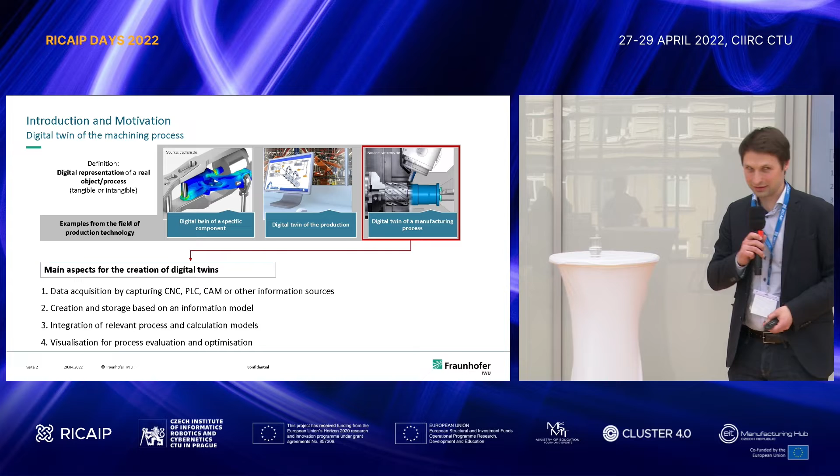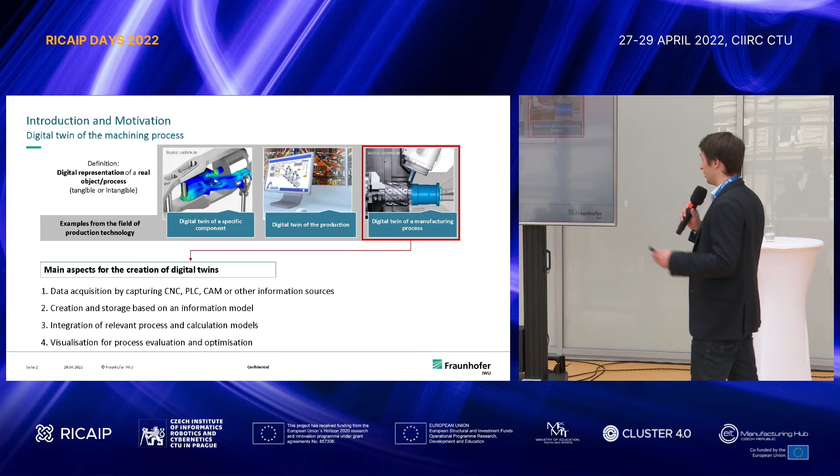I will not say too much about the concept of digital twins, because I think a lot of people have already described what it means. When we are looking at the digital twin, we are focused on the manufacturing process. Maybe there are other fields of focus, but this is our focus.

There are a lot of main aspects for the creation. It is totally clear to have data acquisition from NC, from PLC, from CAM, or other information sources. Then, one of the most important points is to have an information model which describes the relationships of this data you collect, and then to get the knowledge to enhance this digital twin, you integrate relevant process and calculation models.

And I think we see it already, we're also working on a software. Then you need a possibility to work with them.

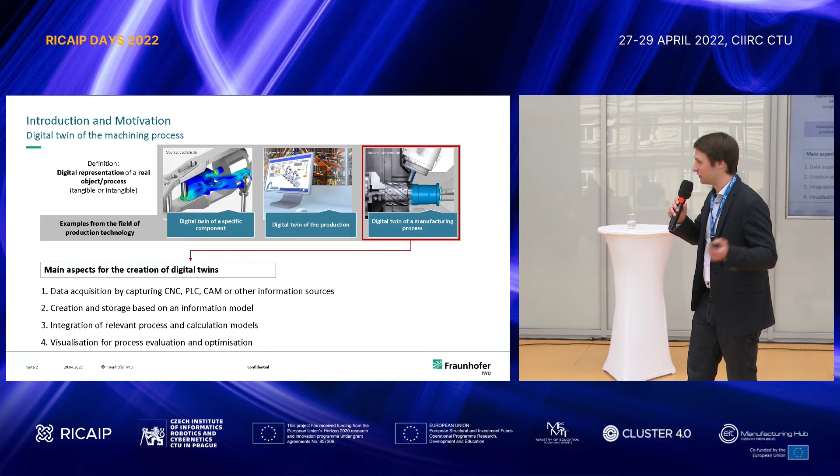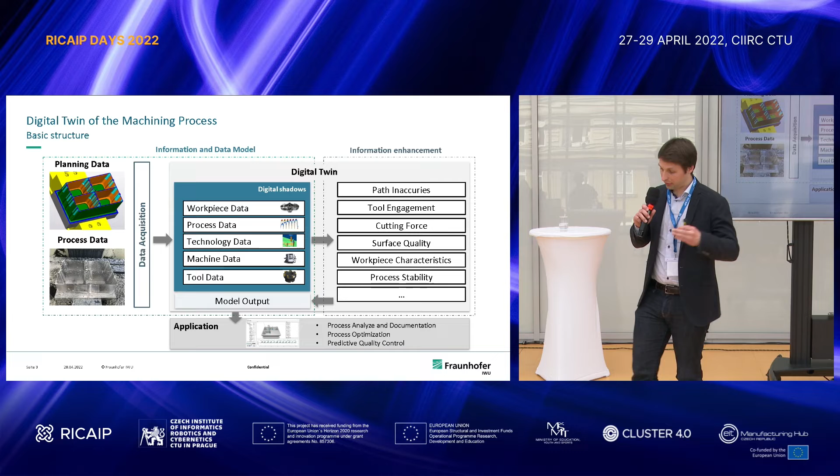When we take a look at the machining process, you have the side of planning data and the side of process data, and then you have to classify this data. We have data about the workpiece, data about the process, technology data, machine data, and tool data, and all of this we have to combine to build up the information model. This is just named the shadow, because it's just a data set without knowledge or information.

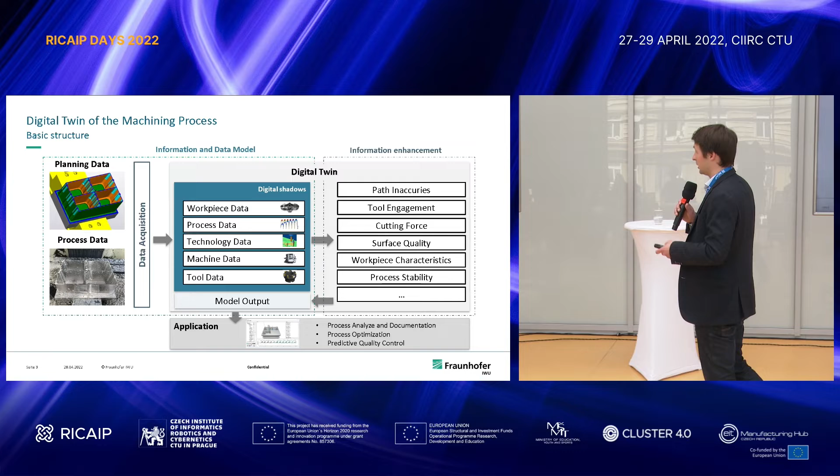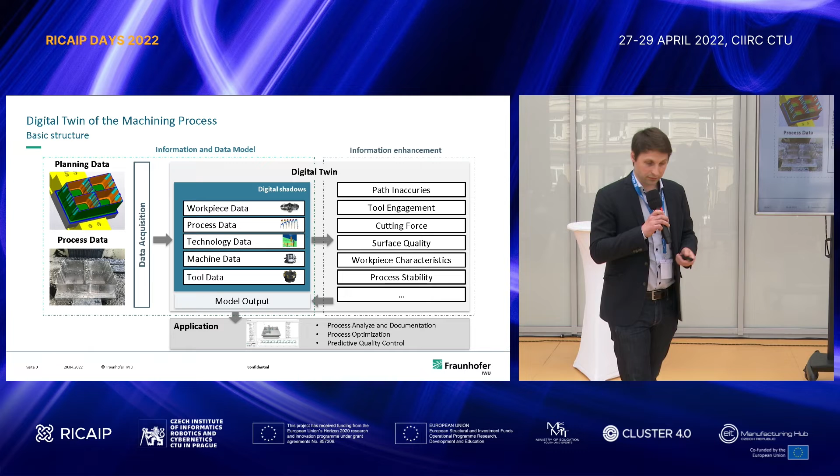Then you have to integrate technologically relevant models. We already see path inaccuracies, tool engagement, cutting forces, surface quality - it's like a modular system. Then we bring it back together, and we have the shadow combined with knowledge or with models, and then we can call it a twin.

When you look at the machining side, we see that we can equip a machine, maybe with an edge device or something else, to collect all the data. This is the left side, and it's all high frequency data - meaning maybe 1 millisecond, 2 milliseconds - actual position, currents, and so on.

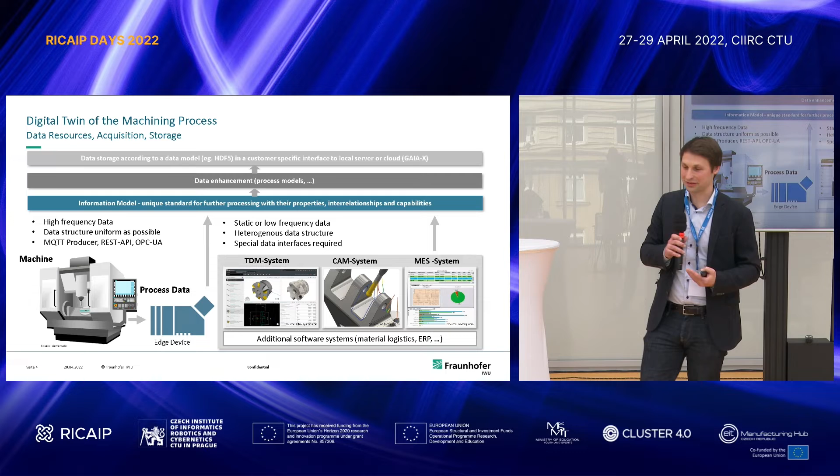There are some possibilities to collect all the data through connections, maybe OPC UA, but for high frequency it's not so common, though there are other connectivity systems. Then there's the side next to the processes - CAM system, tool data management system, MES system - and this is static or low frequency, heterogeneous data systems, which is sometimes not so easy to handle.

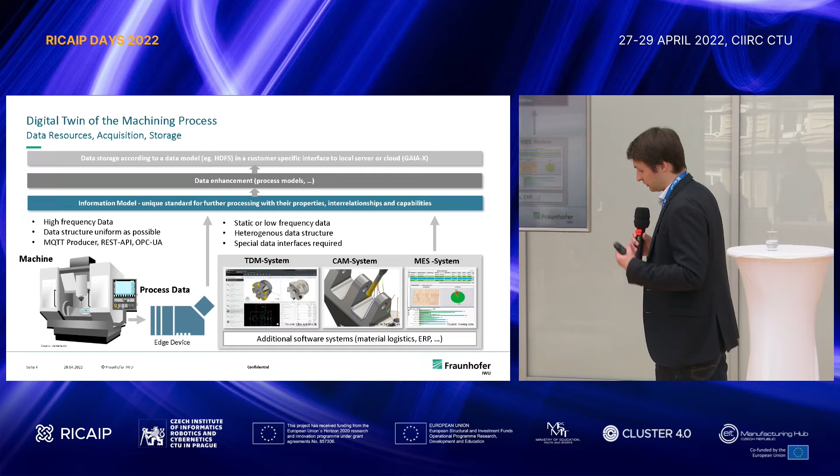We have to bring it together in our unique standard for further processing, to describe all the properties and relationships. Then our data enhancement increases with all the models, and then we have the discussion about data storage. In our solution, we work with the HDF5 format - a portable hierarchical data format developed by NCSA - which gives us the possibility to store time rows and also meta information.

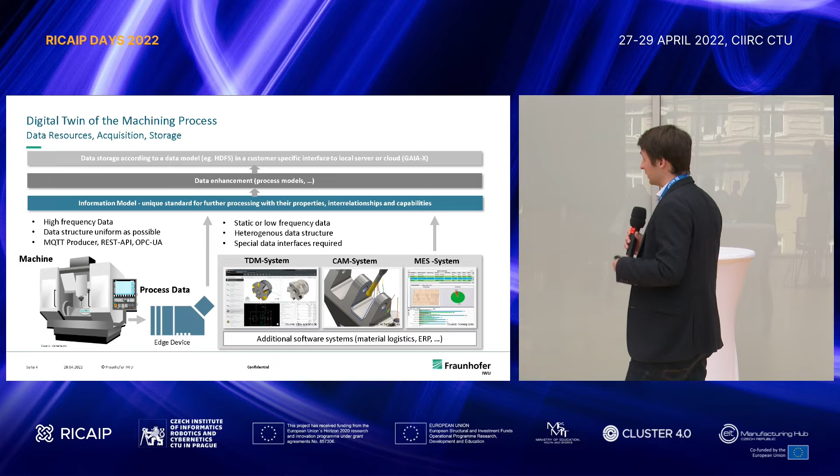And then you also have other possibilities to store it, cloud systems according to Gaia-X, or something else. So that's at least one example, but there are a lot more models.

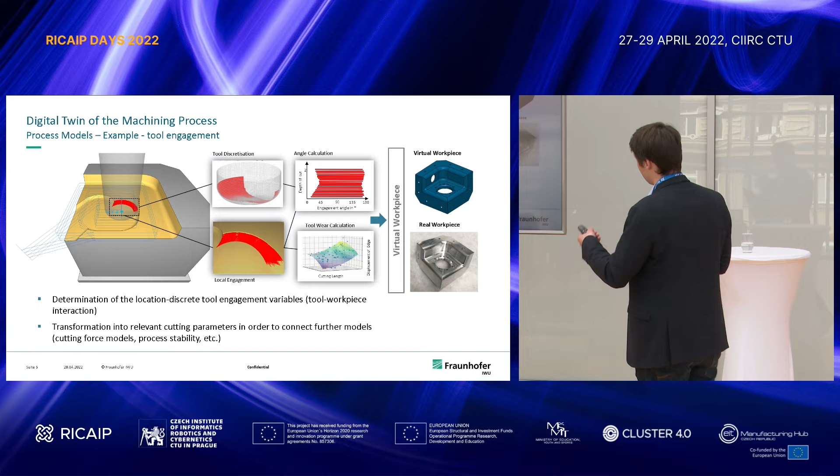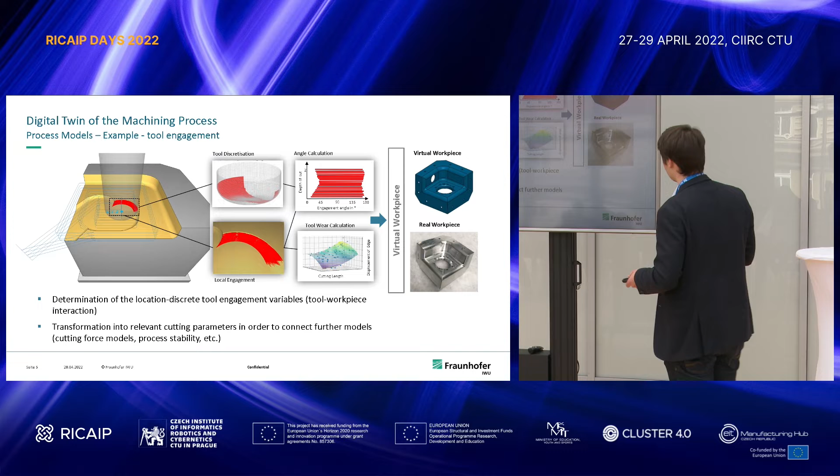One example, I think an important model, is tool engagement. There we have to discretize the tool, identify the engagement situation, get the local engagement, and get the angles, and maybe integrate some tool wear calculation. It depends a bit on which models you use.

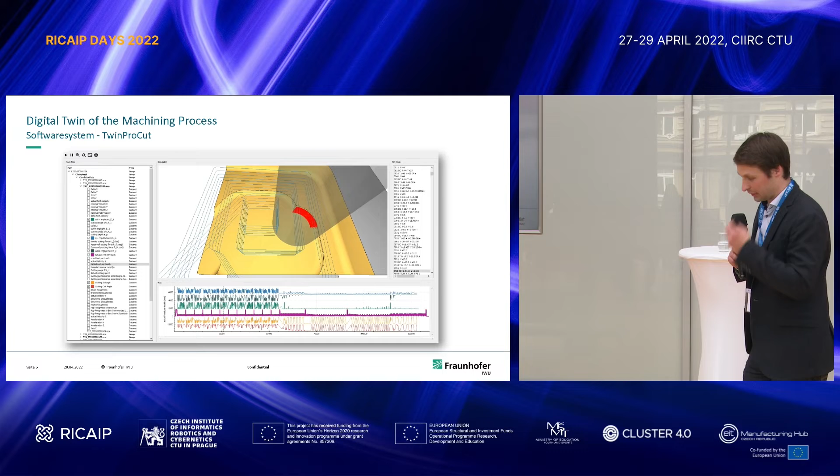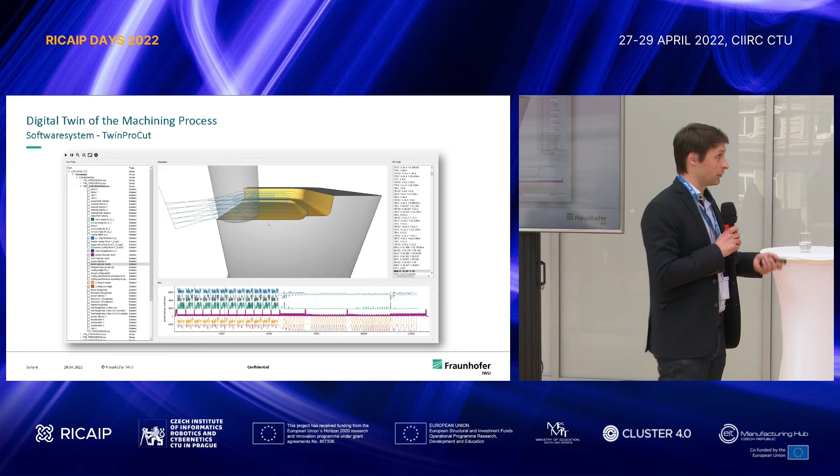And after that you get a virtual workpiece based on the process data. So, a short view of our software: you have the possibility to see what happened in the process with all process-relevant data. All this virtual solution is based on process data. There is no NC interpreter or anything else, it's just based on the process information.

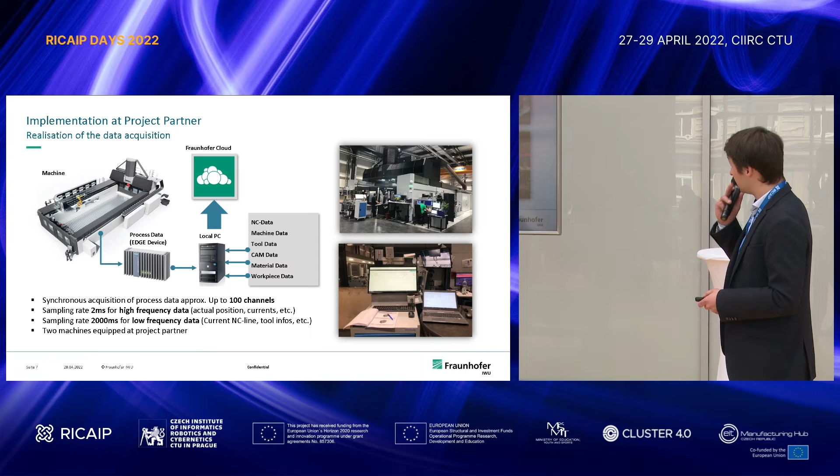So maybe this is finished regarding our solution and thinking about a digital twin, and I will say something about how we use it and implement it in a company for a project partner, where we equipped two machines with edge devices.

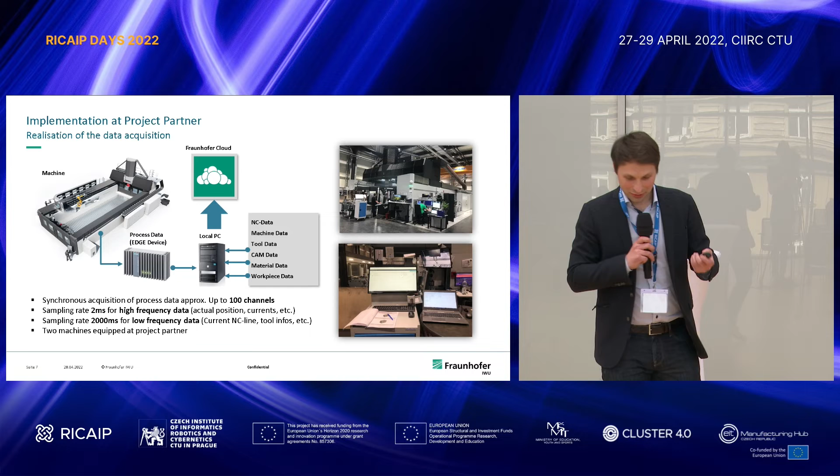We connected it to our computer system and to the Fraunhofer cloud, and all the time we collect data according to our information model, and then we sit in our office and analyze what happened. So it was possible to see some demonstrations showing what the tool engagement was along the tool path, what about the cutting forces, what happened there, so you have a representation of the discrete location and what happened in the process.

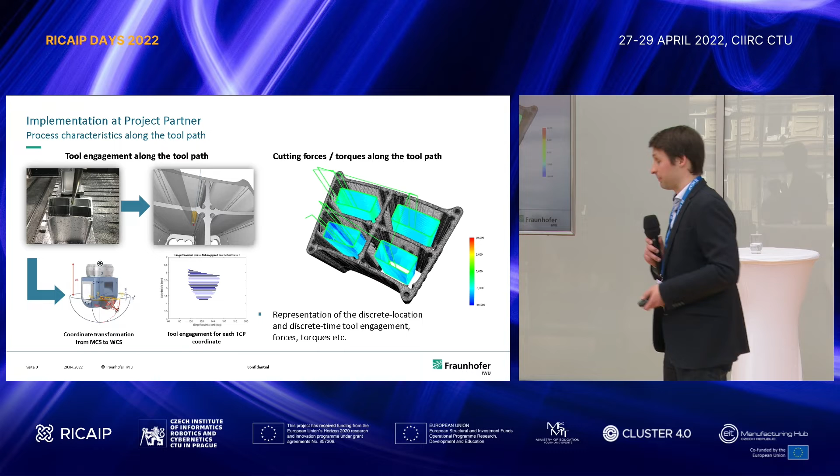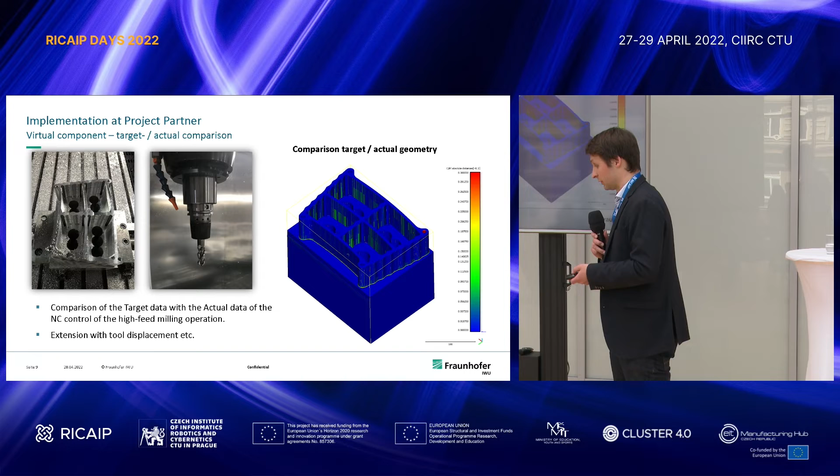And then you have the possibility to get a virtual component and make a comparison to the actual geometry, and then you see what happened with your quality, with your tool, or something else.

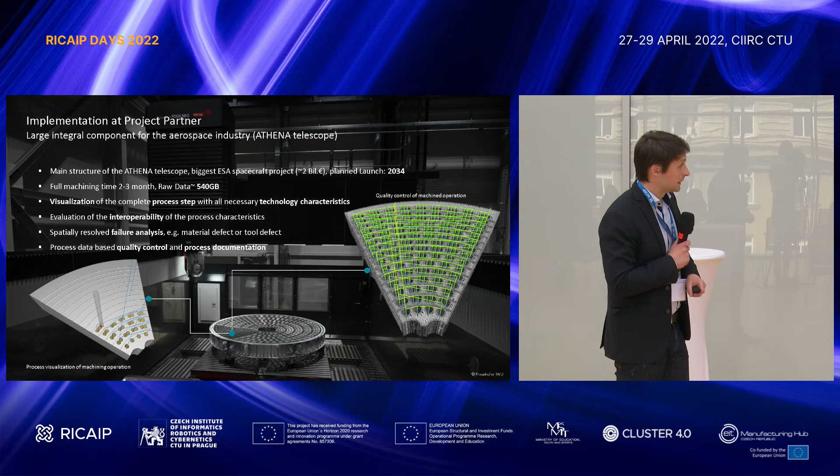So now I have an example. I think it's a really impressive one, because maybe Professor Ehrenfeld mentioned something about it this morning. It's a part of a large structure component for the Athena telescope, the biggest ESA spacecraft project. The planned launch is 2034, and they plan with 2 billion euros.

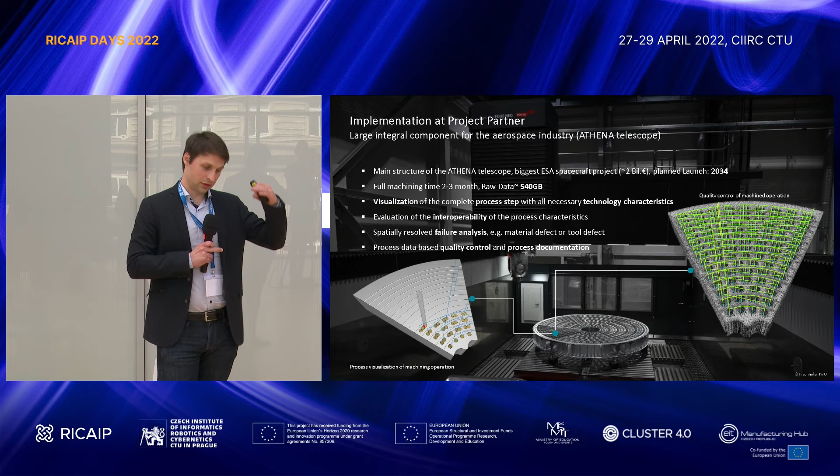And the main part of this project is a mirror structure, an integral machined component with a 4-meter diameter and a height of 330 millimeters, fully machined in one piece.

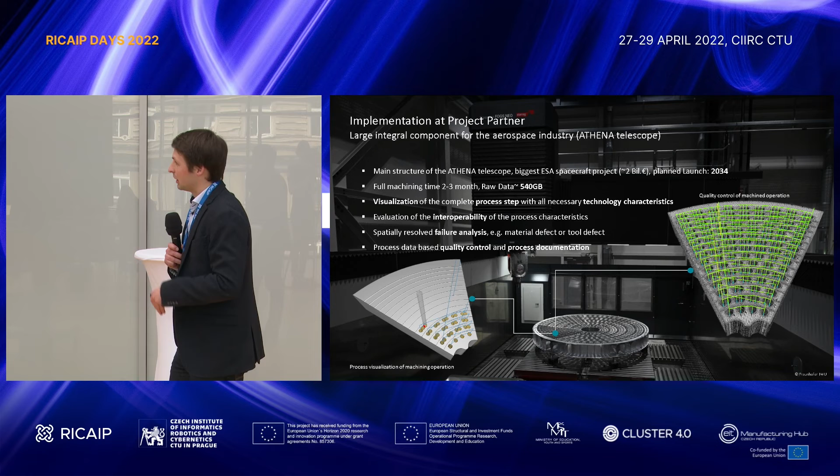And there we integrated our solution, meaning we collected all the data, around 540-550 gigabytes, all the time, according to our model. Then it was possible to visualize the complete process step with all necessary characteristics, and to see whether there were failures related to material defects, tool defects, and so on.

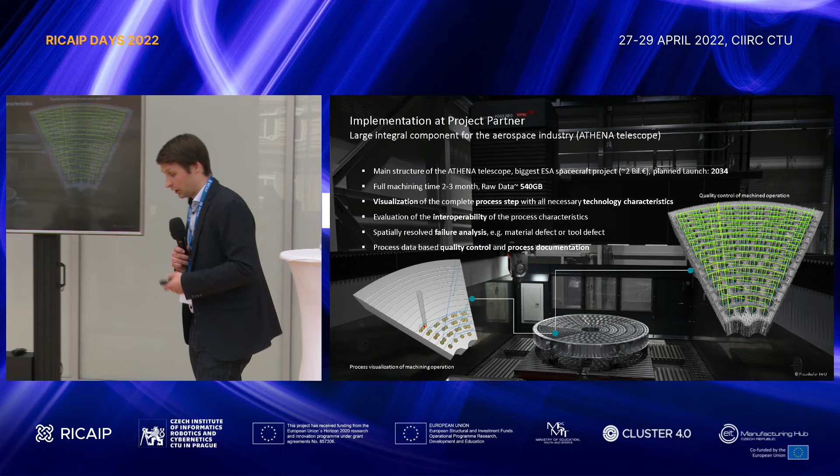And since it's a spacecraft component, it's also important to have a well-documented process evaluation, and with our solution it's possible to have a process data based quality control, and process documentation.

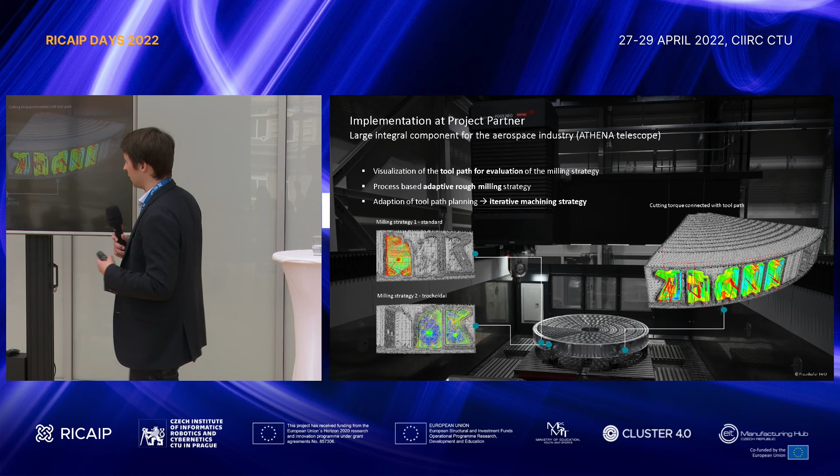So you have the possibility to see the tool paths, to investigate the best milling strategy, and to evaluate the process during the process itself, because this is a one-piece shot and everything must be clear.

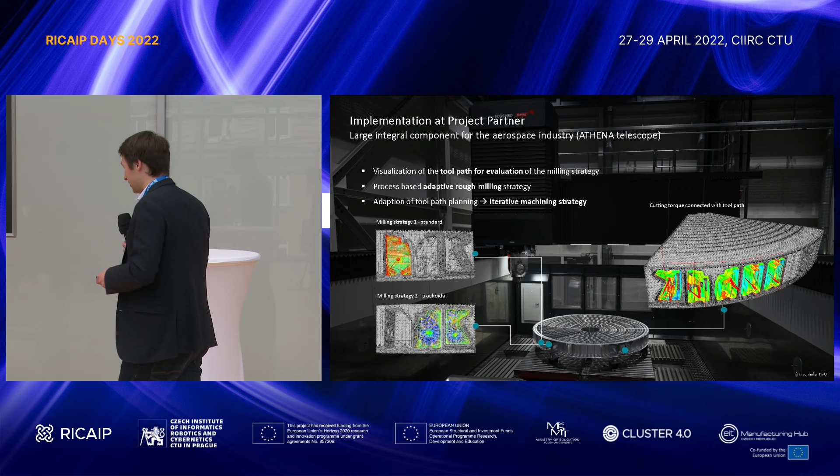And with our solution we help produce this part, and maybe in 2034 we will see it in space.

So, and lastly this is our Czech-German relationship, or friendship, partnership. We built up a project together with TOS Varnsdorf, and there we also integrated our solution.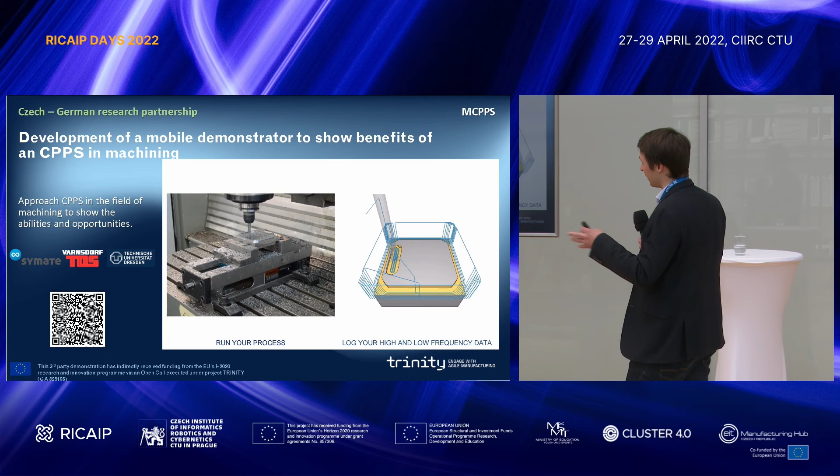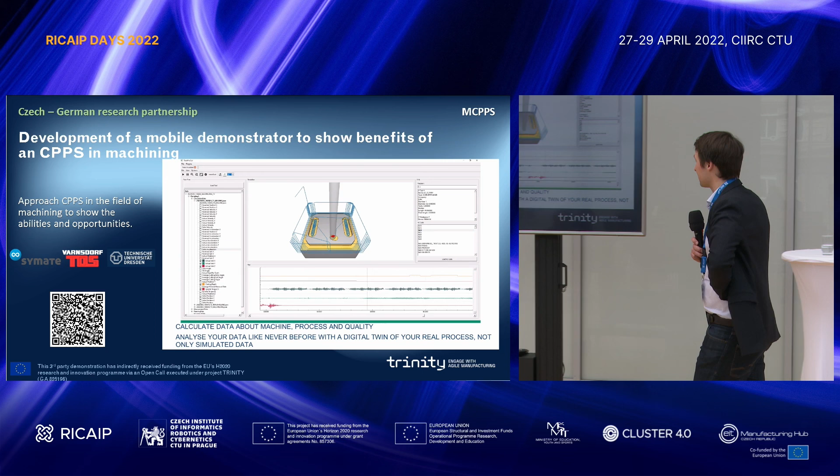And we're building up our system together with the Technical University of Dresden and also with another company from Dresden, Symate, so that we have the possibility to store all the data and bring it into our software to enhance quality and show what happened in the process.